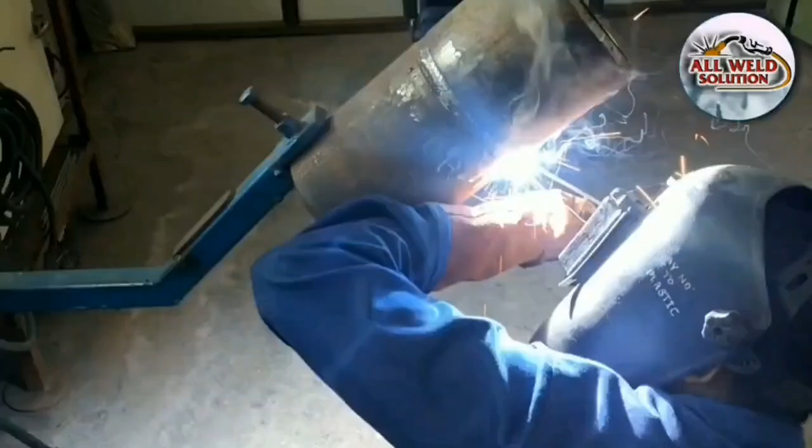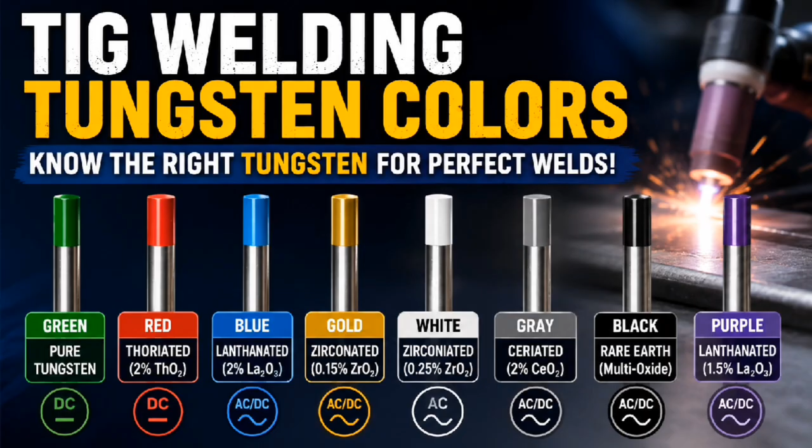Are you confused about which tungsten to use for TIG welding? Should you use green, black, red, white, or gold? Which tungsten should you use, and which one is best for aluminum, stainless steel, mild steel, AC or DC? This is what we are going to see in this video. I will explain how to select tungsten electrode color based on the application, the base metal, and tungsten. So let's get started.

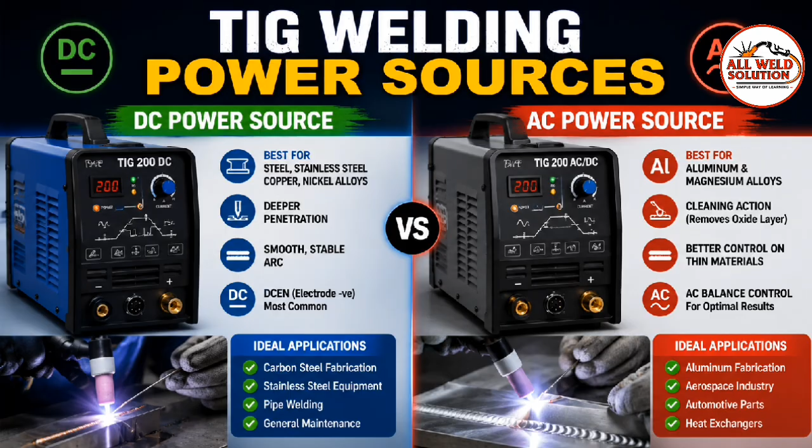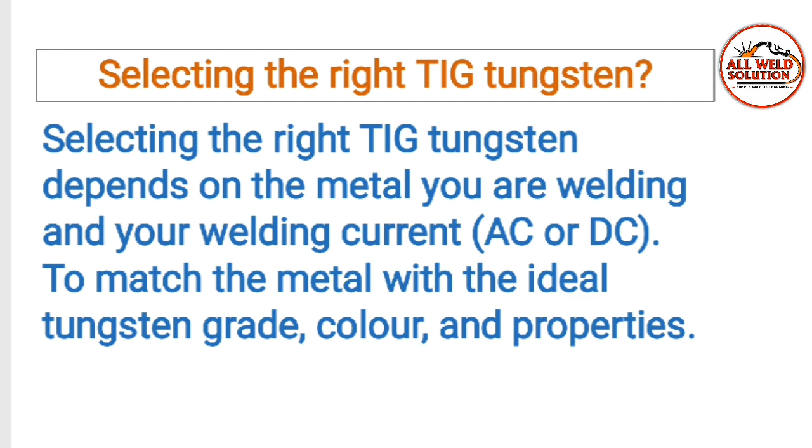So now the question is how to select the right tungsten. Selecting the right tungsten depends on the metal you are welding and your welding current, AC or DC, to match the metal with the ideal tungsten grade, color and properties. Various metals such as mild steel, stainless steel, aluminum, copper, cast iron, and nickel alloys can be welded.

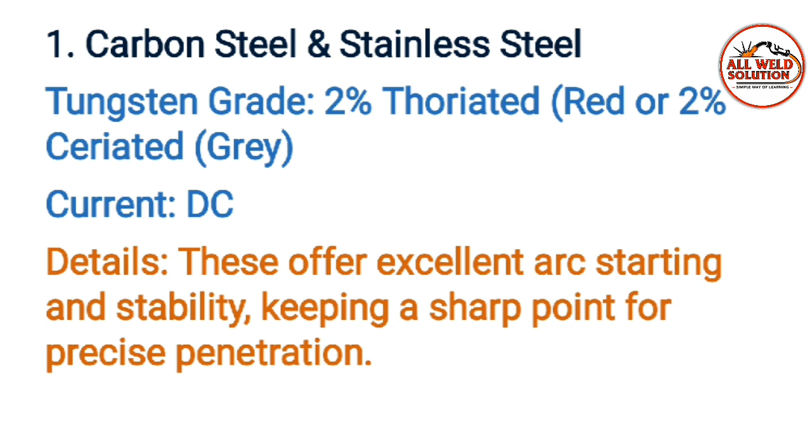For carbon steel and stainless steel, you can use tungsten grade 2% thoriated red color, or ceriated 2% gray color. The suitable power source is DC current. These offer excellent arc starting and stability, keeping a sharp point for precise penetration.

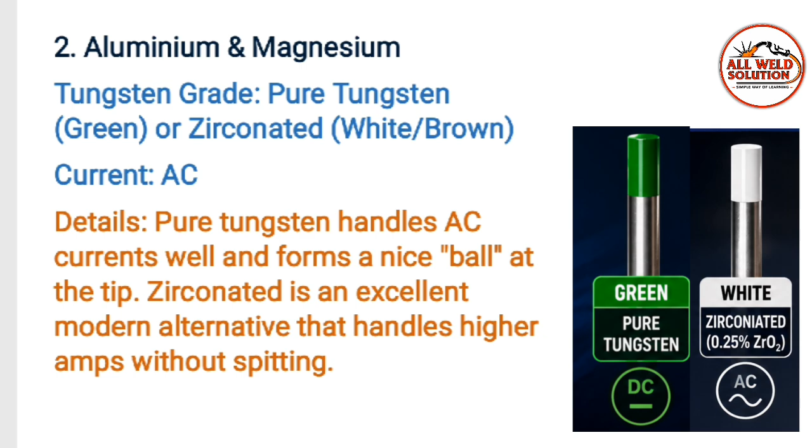Another base metal grade is aluminum and magnesium. For this grade, you can use pure tungsten green, or zirconiated white or brown tungsten. These tungstens are suitable for AC current. Pure tungsten handles AC current well and forms a nice ball at the tip. Zirconiated is an excellent modern alternative that handles higher amperage without spitting.

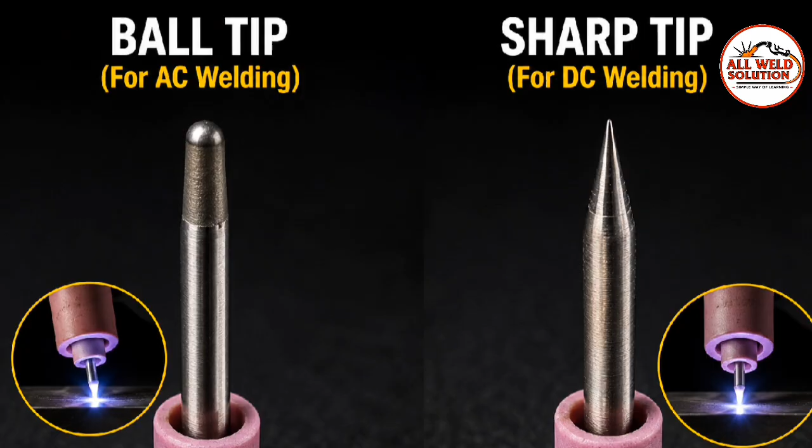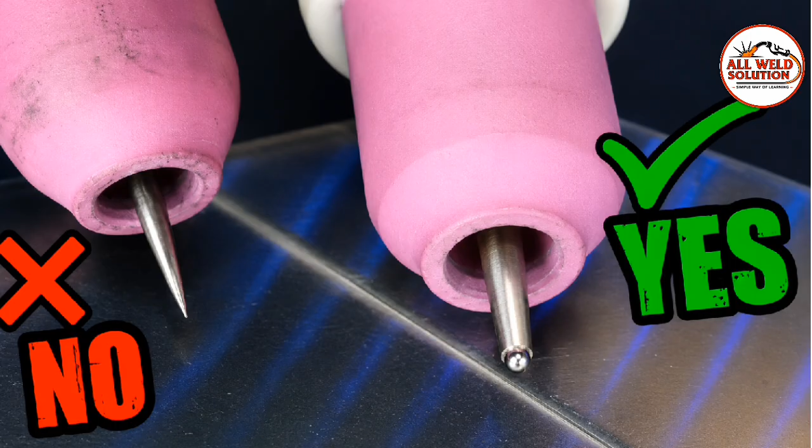Tungsten electrodes are generally prepared in two forms: a sharp point and a ball tip. A sharp pointed tungsten is commonly used for DC welding of materials such as mild steel, stainless steel, copper, and nickel alloys. For aluminum welding with AC current, a ball tip tungsten is preferred. Ball tip formation is easier with green pure tungsten and white zirconiated tungsten electrodes, making them suitable choices for aluminum welding applications.

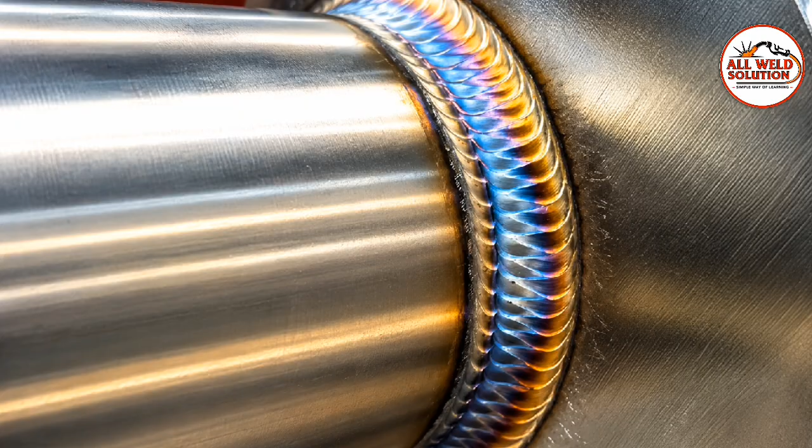Another one is gold color tungsten. Gold color tungsten is an all-purpose universal tungsten electrode that can be used for a wide range of welding applications. It performs well on both AC and DC welding, making it suitable for materials such as mild steel, stainless steel, aluminum, copper, and nickel alloys. Due to its versatility, easy arc striking, and stable performance, it is often recommended for beginners and general purpose TIG welding.

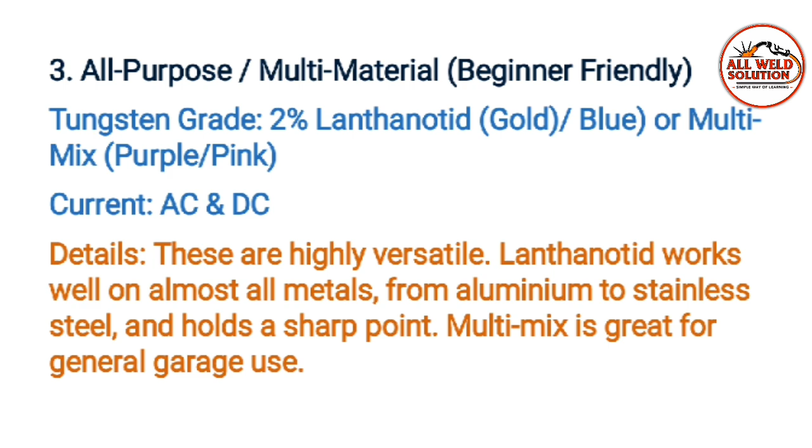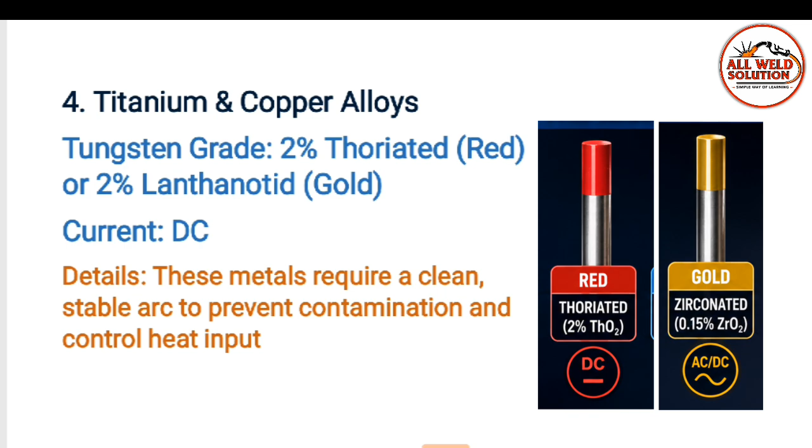Next is titanium and copper alloys. For these metals, you can use 2% thoriated red color, or 2% lanthanated gold color tungsten. This is suitable for DC. These metals require a clean, stable arc, prevent contamination, and control heat input. For this, you can use these two tungsten grades.

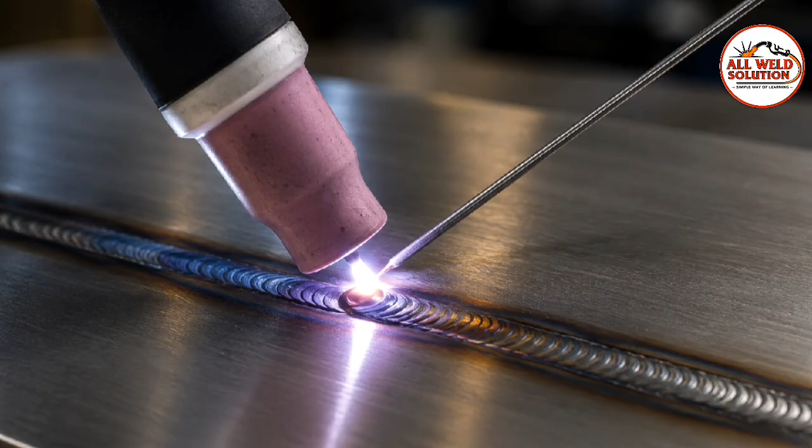So friends, what did we learn from this video? We understood what a tungsten electrode is: a non-consumable electrode used in TIG welding that carries the welding current and creates the arc. We learned how to select the correct tungsten electrode based on the base metal and welding current, AC or DC. We also covered different tungsten color codes, grades, and their applications.

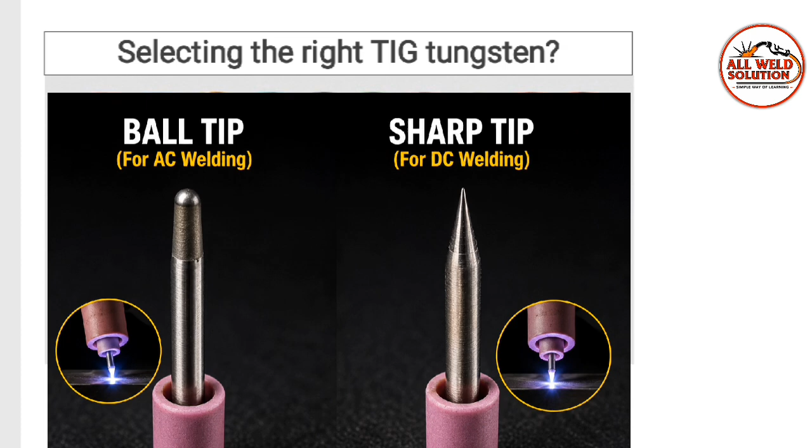So friends, tungsten electrodes are generally prepared in two forms, a sharp point and ball tip. A sharp pointed tungsten is commonly used for DC current, and ball tip tungsten is commonly used for AC current. Based on that, a sharp pointed tungsten is commonly used for mild steel, stainless steel, copper, nickel alloys, and ball tip is used for aluminum alloys. Thank you.